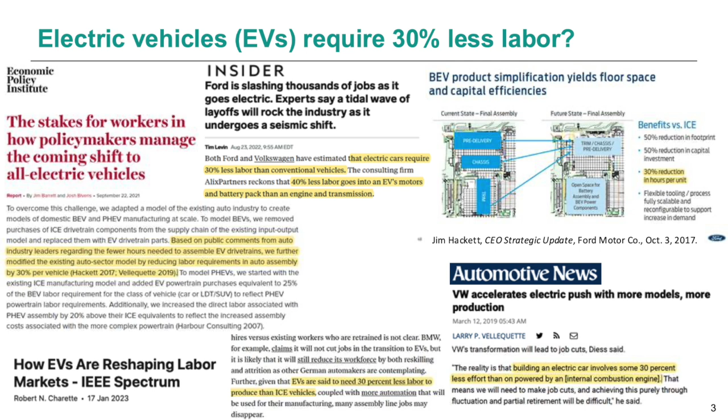Turning to slide 4, let's ask the question: if this is true, if EVs will cause a 30% decrease in hours per unit, or labor intensity, what does this mean? To answer this, let's look at numbers from the U.S. Bureau of Labor Statistics. In 2022, there were 830,000 auto manufacturing jobs in the U.S. - 550,000 in parts manufacturing, and 280,000 in vehicle assembly. If you take 30% of this total number, that implies a loss of almost 250,000 jobs across the board.

And this possibility of job loss is not theoretical - it's already been experienced in the past. For example, take a look at the plot on the right of that slide. Look at that dip in 2008. The y-axis here is U.S. auto manufacturing workers on the left axis. Take a look at 2008 - what happened? Well, what happened was the 2008 global recession.

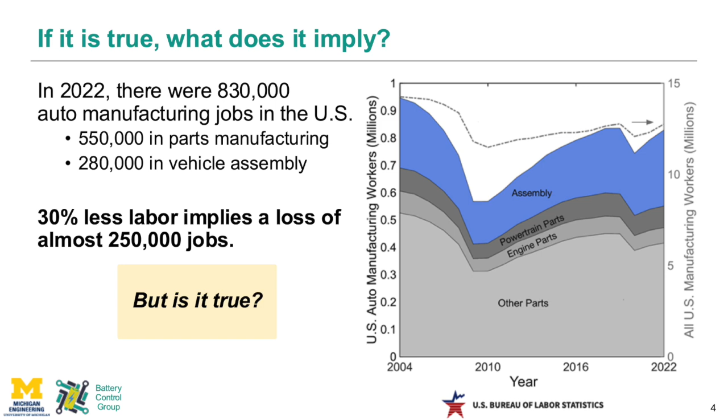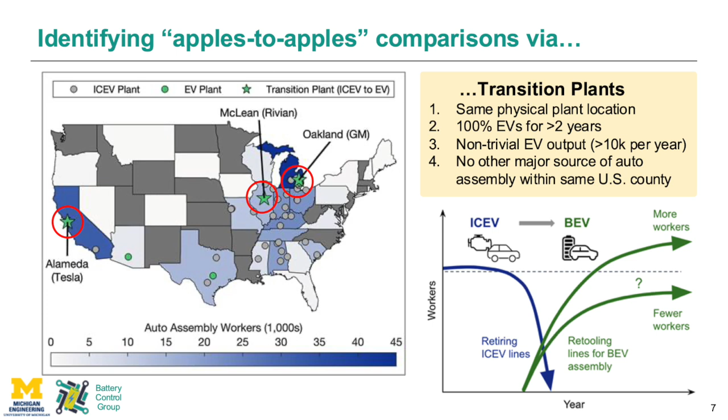So the takeaway for this slide is we developed a method to make the information useful for us. Let's go to the next slide. This is the last method slide.

This is the metric by which we will study and compare the labor intensity before and after the electric vehicle transition at the three transition plants we've identified: Alameda, McLean, and Oakland.

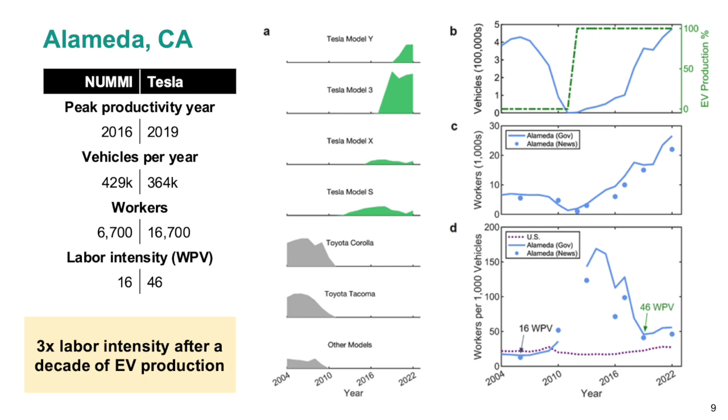I'm going to turn to the next slide in McLean, Illinois. This McLean County, the city is called Normal, Illinois. If you go there today, you're going to see a factory, and Rivian owns this factory now. But it used to be owned by Mitsubishi, and Mitsubishi made cars including the Mitsubishi Outlander, the Galant, the Eclipse, Endeavor, and other models. So this is a historic site of combustion engine vehicle production.

The plots on the right again show vehicles and workers. You can get a sense of how many workers were working there before and after this transition. And then the bottom right plot shows labor intensity.

So just going quickly through this result, the takeaway here is that we have an example in McLean of a new EV startup. With Rivian, they've been around for many years now, but based on their vehicle production volumes and their profit margins, they're still very much in startup mode, and in this startup mode we are seeing that there's more than a 10 times labor intensity increase during the startup phase.

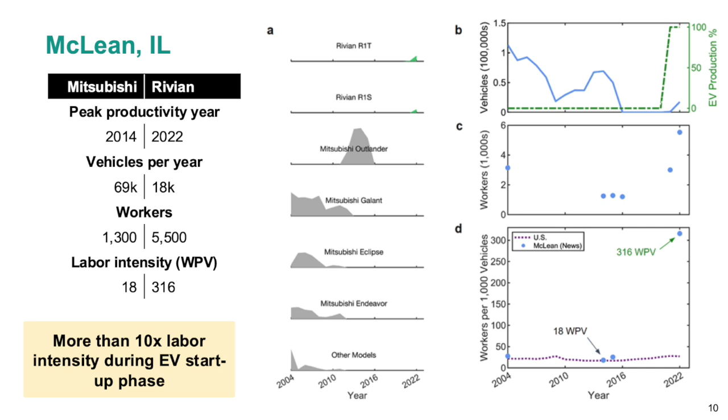All right, I'm going to turn to the next slide, which is our last transition plant. This one's in Oakland, Michigan, Oakland County, Michigan. The plant we're talking about specifically is the Orion vehicle assembly plant. This plant is not like the others in which there was a change in ownership. This plant has been owned by General Motors this whole time. And what changed was that roughly in 2016, 2017, they started producing the Chevy Bolt.

By 2020, that plant was producing exclusively the Chevy Bolt. So this is an example of a plant in which they were gradually transitioning their assembly lines from making combustion vehicles like the Chevy Sonic, the Buick Verano, Chevy Malibu, Pontiac G6. They were gradually converting these lines over until all of the lines were making Chevy Bolts.

You can see the numbers on the right show the trends. Generally speaking, in this particular plant, the vehicle and the worker counts were both decreasing. In fact, I think they're actually closed as of today, and they're retooling it to produce the next generation General Motors electric vehicles. But the data that we have to work with for this study is the data in 2020, 2021, and 2022.

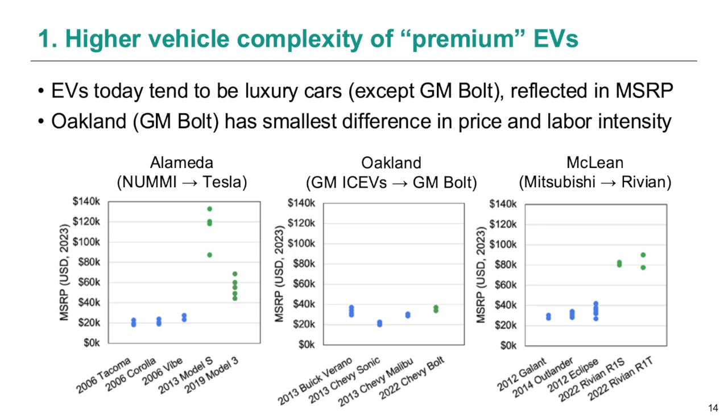But it's also interesting if you look at the Oakland case. Oakland has the smallest difference in price - the Chevy Bolt is priced at around the same price point as some of their other vehicle offerings, about $40,000. And if you recall the previous result, Oakland also had the smallest difference in labor intensity. So I think this is a data point on the other side confirming this idea that maybe labor intensity is a function of how premium the car is, and maybe over time when Tesla and Rivian make more and more cars, this labor intensity will converge towards the previous labor intensity value we saw in combustion cars.

Let me talk about slide 15. Slide 15 is a note about investment in manufacturing R&D. Of course, these are new technologies - new powertrains, electric vehicle motors, batteries, battery packs, power electronics. I think all of these require more investment in an engineering workforce and technology development, and we think this could explain some of the increase in labor, specifically increasing the number of workers in these factories as they iron out the kinks of these technologies.

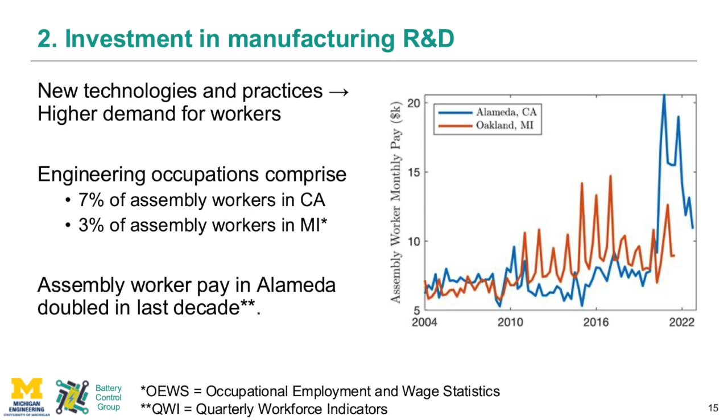The last element, and might be the most important one, is vertical integration. I'm on slide 16 now. The question we're trying to ask here is how much of the car and its parts are actually made in the assembly plant, and how might this change with the electric vehicle transition?

The table on the left summarizes, based on our investigation, this is our belief of what is happening in each of the three plants we've studied. In terms of what can happen, there's vehicle assembly, battery pack assembly, and cell manufacturing. What we found is that vehicle assembly happened in all three transition plants, but none of the three plants included cell manufacturing.

The gray area is in the battery packs, and each plant did something different. In the case of Alameda, I'm talking about the Fremont Tesla plant, our investigations showed they were making battery modules and battery packs for the Model S and Model X on site in the Fremont factory. This is publicly available information. However, when they started making Model 3 and Model Y, the more mass production cars, production of battery packs shifted to the Reno, Nevada plant. This is also publicly available information.

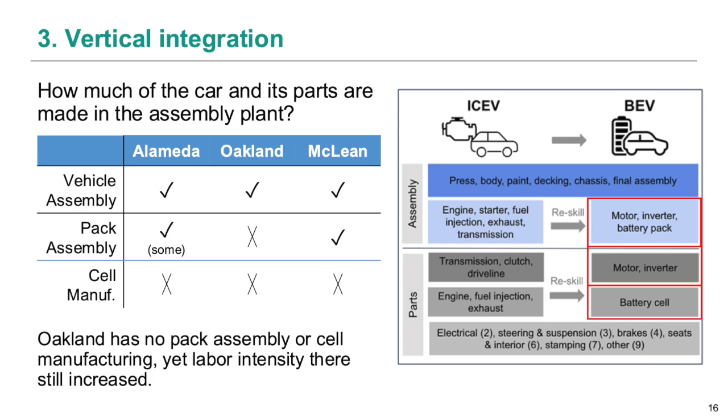If you look at panel D on slide 11, what's fascinating is that the Oakland plant's labor intensity, in blue, lines up pretty much exactly with the macro level US trend shown in dashed purple. So maybe it's not that switching to the Chevy Bolt caused an increase in labor intensity, but rather that whatever simplifications the Bolt's electric vehicle powertrain was supposed to offer, it wasn't enough for these guys to buck away from the macro level trend we were seeing in the broader automotive industry.

For all these reasons, I think our diverse array of case studies is a really fascinating and compelling examination of EV manufacturing workforce trends. So what we're setting up now is a bigger discussion of where do we go from here. What else is there to look at? What we've shown you up to this point is just the assembly plants.

This is the trade-off we had to make. We really wanted to look at a historical approach using data that anyone could access, as Andrew and I set up earlier in this talk. In order to do that, one trade-off was to limit the scope of the manufacturing chain we looked at. We were really just looking at the final step, the vehicle assembly plant, where the thing coming out is a completed drivable car. There's so much more to this study, though, if you start to look more upstream and even downstream of that process.

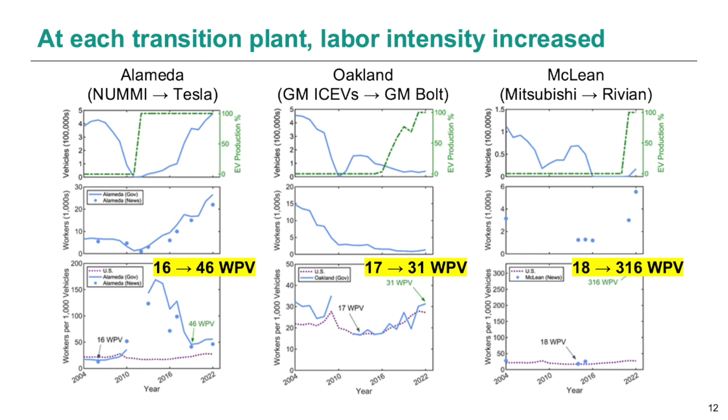Omar said it right - we wanted to give the best perspective we could based on the data we had, and we really wanted to clarify what was going on in these vehicle assembly plants. And where do we go from here? That's the question Omar asked. Well, I think we need to talk about parts manufacturing. Because if you look at Michigan, there's more parts jobs than there are assembly jobs, and we're talking about people making transmissions, combustion engines, and I think a very fair question is what is going to happen to those jobs. I think we need to do more work to answer that question.

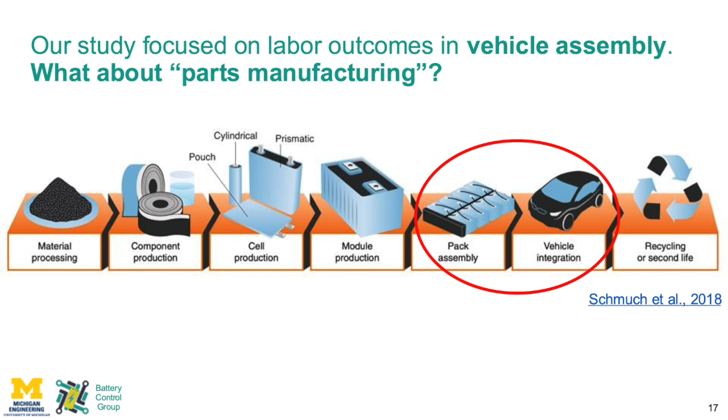So let's take a look at slide 18. The plot on the right is actually in the supplemental information, because we think there's a lot more work that needs to be done here. But what we're talking about here is really supply chain integration. So when we talk about the automotive workforce, the first thing we think about is the people who are making the cars, and then it's the people who are making the parts.

What is a part in an electric vehicle? I think this is a fundamentally confusing question because it is definitely true that electric vehicles have fewer mechanical moving parts. If you just look at transmissions, combustion engines, there's a lot of physical parts. Well, what that is for batteries is not clear.

I think probably the most obvious thing you can think about is the battery, and the battery cell - these are individual cells strung together to make a battery pack. The amount of labor that goes into battery pack manufacturing is really what we need to consider when we talk about whether there will be jobs in the electric vehicle sector to replace the legacy jobs in transmission and combustion engine manufacturing. So the point I'm trying to make is that we want to figure out where to draw the line in the supply chain.

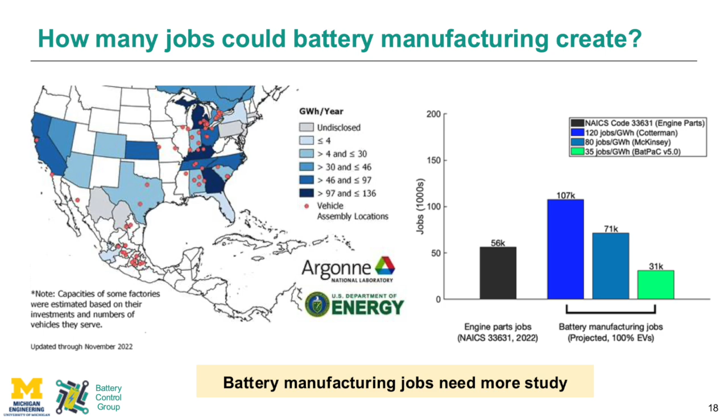So the last slide is slide 19. Let me just summarize what we've talked about in this hour together. We've looked at 3 US auto plants that have transitioned from making combustion cars to electric vehicles. For all 3 of these sites, we found that more workers per vehicle were needed, not fewer. The biggest takeaway from our work is that the rapid widespread loss of jobs - i.e. 30% less labor during the EV transition - we think this is a smaller risk than many fear.

We want to end with a suggestion to everyone that we need to do more work. Omar and I started this work because we think we found a question that's really important for us to answer as a research community. I think we're just at the start of the process of developing methods and adding rigor into some of these claims and the data, which I think is going to have important policy implications. We need to do more, and future work here should focus on upstream EV manufacturing and possibly even downstream processes like recycling.

The QR code is a link to our paper. I welcome you to reread it. I hope we've done a decent job summarizing some of the main takeaways from the work. And I want to give Omar the last word.

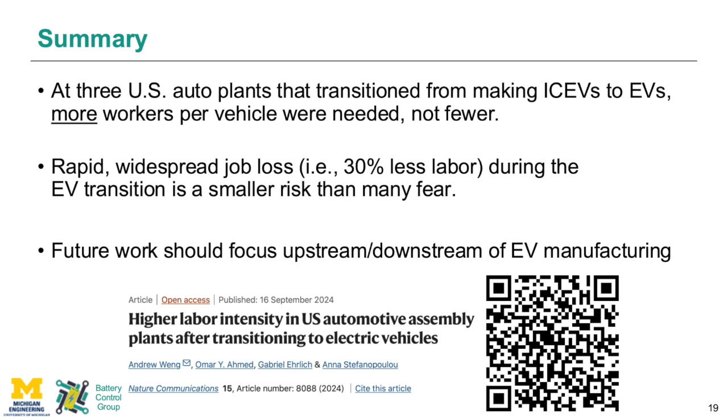Thank you, Andrew and Omar. Thanks for the very succinct presentation. I'd like to congratulate you for this paper, because when we first started communicating about this, I thought it has a lot of implications. You're looking at the ecosystem you investigated, but on my side, being in the industry myself, I also looked at my ecosystem, the supply chain, and the effects happening, because every ecosystem has its own supply chain and distribution. So it has great implications for policy planning and sociology -- so many implications everywhere. I'd like to congratulate you for the talk, and I hope you go further because it's very relevant.

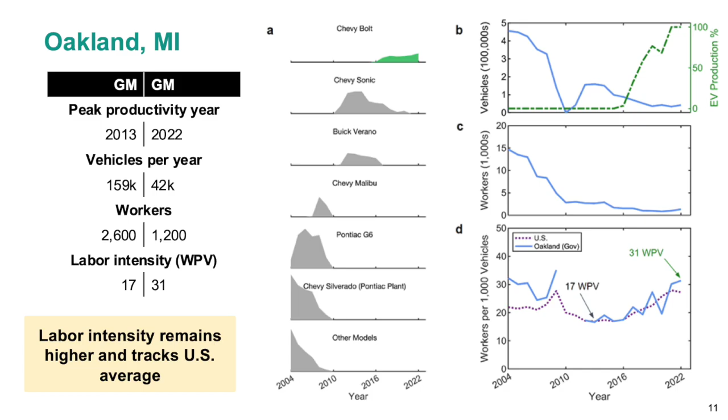Thank you for waiting. Yeah, of course. It wasn't a real question I had, but I just wanted to say, I just came in the room randomly, but you guys had a great presentation, and I've been in the industry too. I was working for Lucid Motors for a couple of years up until recently, and I was working for a while on the factory plant in Casa Grande, Arizona. There was a time where I was practically just living on that factory floor, and I'm in the software side, so but I do see what you mean.

There are so many jobs that have just been created, and just seeing that small town and talking to the people there, I think Lucid pretty much employs over 20-30% of all the people in the town. I've just been seeing so many jobs being created in these towns in the middle of nowhere. Like Sparks, I think that's where Tesla's Gigafactory is. Just random towns in Nevada and Arizona, and they're just being created in the field from these EV plants. So yeah, I think battery manufacturing jobs and all these create more skilled labor jobs mainly, and that's what I wanted to add. It's not just any jobs, it's a lot of skilled jobs, which I guess is a really good thing.